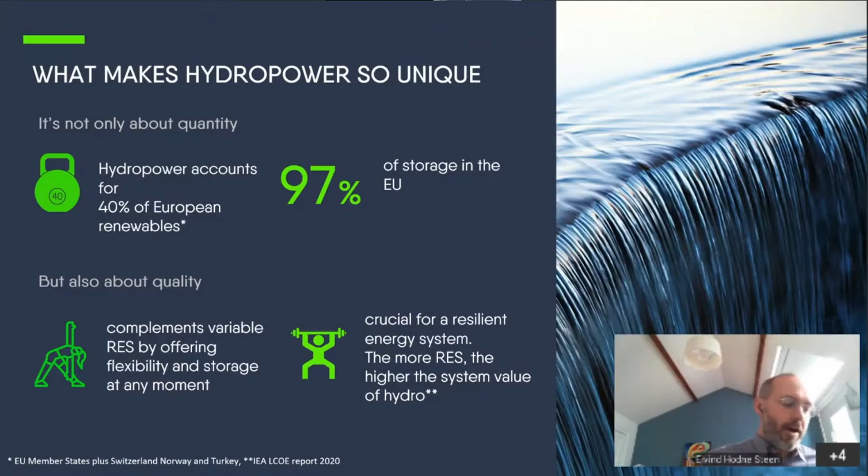And that is about the quantity, but then of course we know that the qualities of hydropower are important. It offers flexibility and storage at any moment. This will of course be brought up today in the session. But just one last point is that the more renewable energy we have, the higher the value of hydropower is in the system. So that's an important thing to bring to the table.

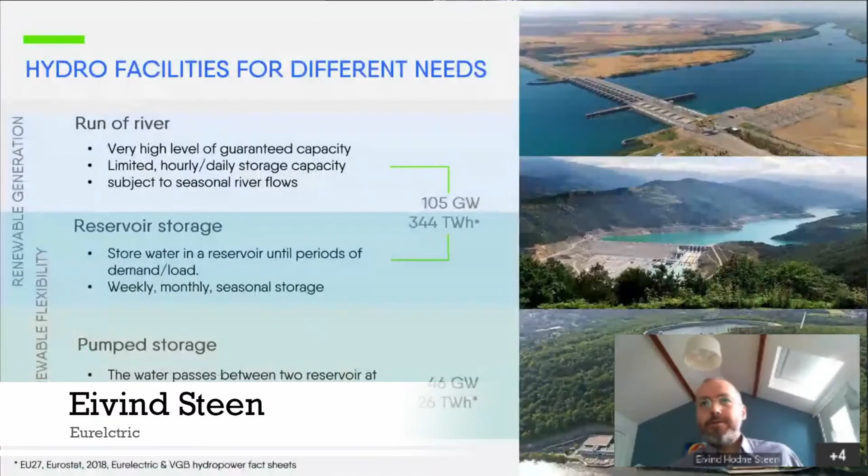So when we go into the numbers, we have, of course, hydropower facilities for different needs, and at least in our case in the Eurelectric world, we roughly divide it into two: renewable generation and renewable flexibility. And under there we have run-of-river, reservoir storage, and pump storage.

So if we look at the generation capacity of run-of-river and reservoir in Europe, you have 105 gigawatts. But if you bring in Norway, Iceland, Turkey, UK, and Switzerland, the numbers are obviously higher. We are about 180. And when we're looking at the generation of run-of-river and reservoir, we are at 344 in EU 27. But when we bring in these countries that I already mentioned, we are almost at 600 terawatt hours.

And then we look at pure pumped storage. We have a capacity of 46 gigawatts in EU 27. That goes up to 51 if we include these other countries. And the generation is at 26 terawatt hours, but with this larger scope with these other countries, you're at 31 terawatt hours. These numbers are 2018 numbers, so of course these are moving quickly. It's already 2.5 or 3 years.

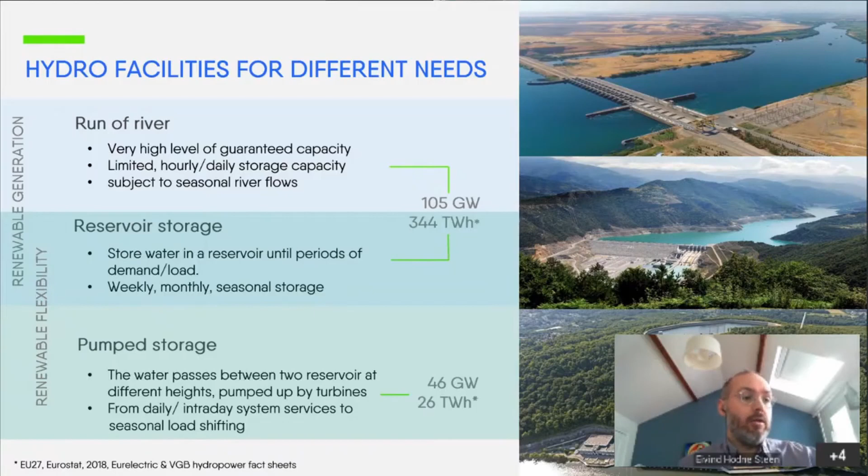In 2018 there were 1,005 terawatt hours of renewable electricity in total in the EU. I don't have a recent number there, but that is for sure a lot higher today. But to put this into context, we are in a situation where the EU has increased its climate target. That means that you need to have even more renewable power generation. So if the European Union is to reach their goal of 55%, you will need up to 67% of power generation to be covered by renewables. And wind will have to double, and solar would have to triple.

But what is interesting from the impact assessment from the European Commission is that they are also looking at an increase in hydropower generation of about 10%, and increased capacity of 40% for pumped hydro. So the Commission itself is looking at an increase of hydropower overall. So with that, I'm not going to go into more details. We're at the end, and I'm looking forward to hearing the other participants. Thank you very much.

Thank you, Eivind. Hydropower has a long history in Europe and is tightly connected with industrial development in many communities. One such place is Tyssedal in Norway. And I'm glad to give the word to Knut Markhus, Director of the Norwegian Museum of Hydropower. Thank you very much for the invitation.

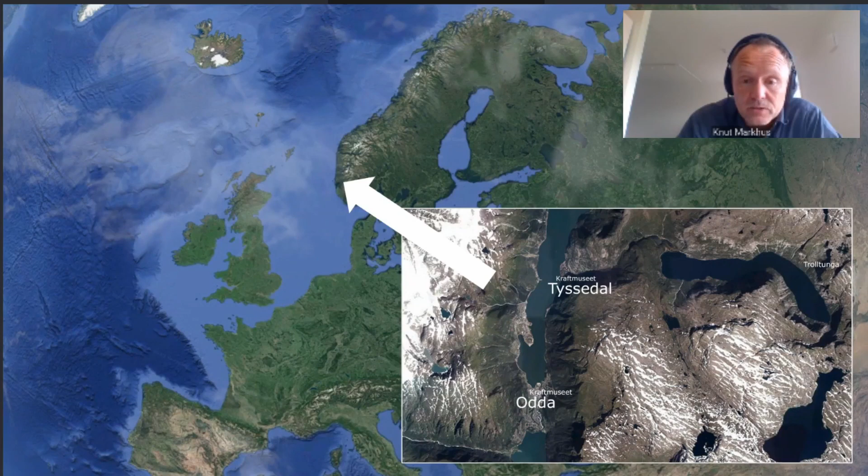The power plant is situated in Tyssedal, a small industrial village close to the small town Odda. This part of Norway is ideal for the use of hydropower, and Norway has taken advantage of that. There are many power plants in the west of Norway, where you have access to the sea, the connection to the rest of the world.

If we move back to the end of the 19th century, these were small farming villages. Odda had quite a lot of tourism, with many hotels rising, but no industry really. Tyssedal had only 2 farms with around 30 inhabitants, so it was a quiet place.

In the dramatic nature surrounding Odda and Tyssedal, the waterfalls and wild rivers were numerous, and the main attractions in the growing tourism. Some small mills used the running water, but the main use of the waterfalls, if you think business, was the magnetic power they had as tourist attractions.

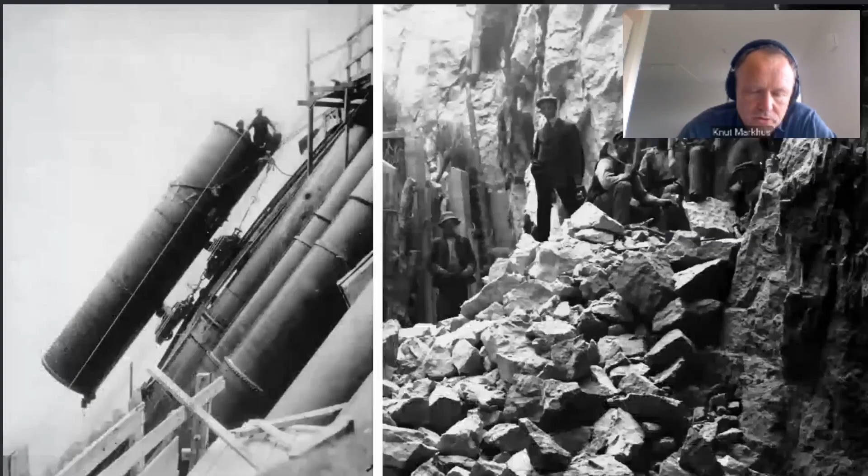And a great advantage is the fact that these places are located by the fjord with a sea route to the international markets. The group decide to go for this, and deals are made. And just a few months later, the construction work starts in Tyssedal and Odda. Sam Eyde is the general director for the hydropower company.

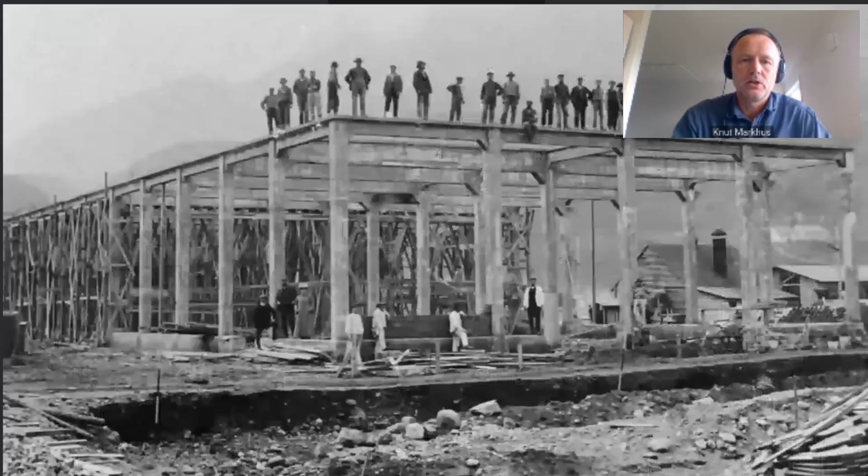Two big factories in Odda are planned and built by the Alby United Carbide factories and the Northwestern Cyanamide company. Alby to produce calcium carbide, and Northwestern to produce calcium cyanamide, and these two were linked together. Both of the companies had their headquarters in London, and this is an important thing. Many of the industrial establishments in Norway in this period have a foreign ownership, mainly Swedish, French and British.

And in less than 2 years, very quick, the hydropower plant was established, and the factories as well. And this was typical of the time, that factory and power station were built at the same time and close to each other, because the power was local. There was no system to transport it.

The completion of the construction in Odda and Tyssedal was quite impressive. The hydropower plant was the largest high-pressure power plant in Northern Europe, and the construction of the carbide and cyanamide plant was one of the largest undertakings of its kind in the world at the time.

Rapidly, Tyssedal and Odda developed from a farming district to modern industrial communities, complete with housing developments, schools and social services. In just a few years, the population in Tyssedal rose from 30 persons to more than 1,000.

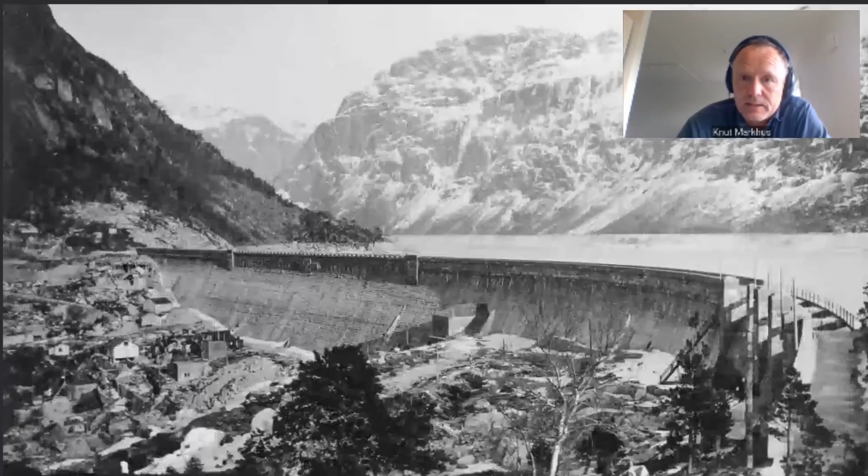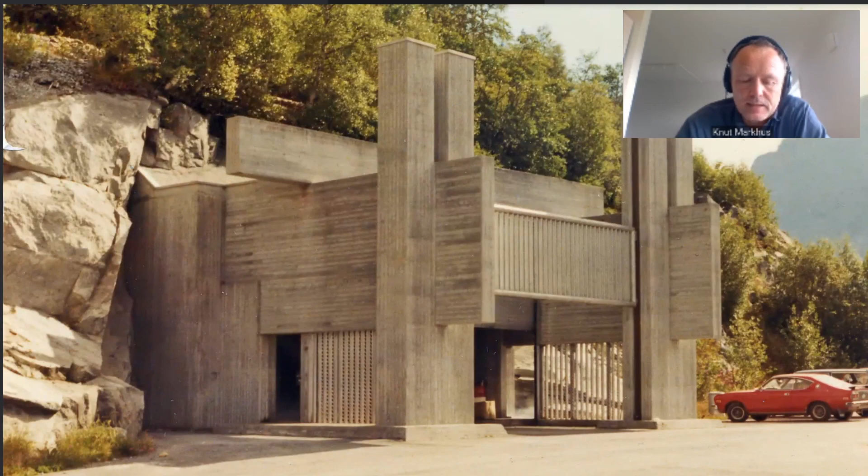The development of the hydropower plant and the industry continued the next years and the next decades. The huge Ringedal Dam was finished in 1918. A new power plant, Tyssedal 2, was finished in the same area in 1967, and now the power production in Tyssedal became a part of the national interconnection hydropower network.

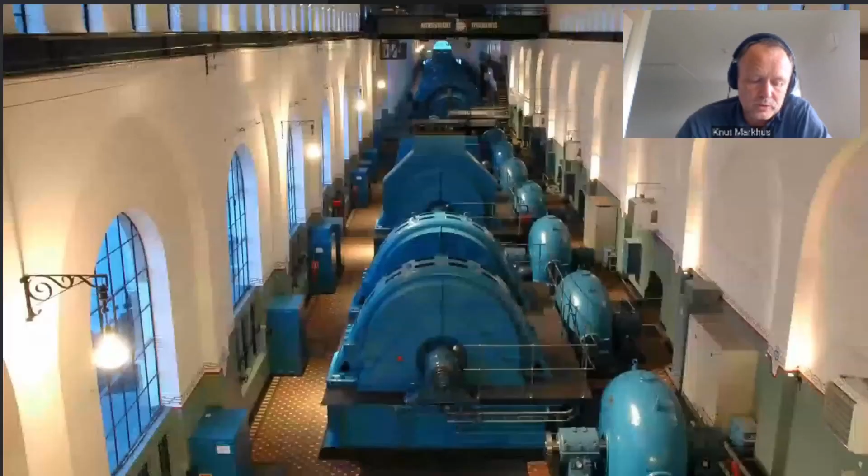When we come to 1980, the new power plant Oksla was placed inside the Tyssedal mountain. The old power plant that started its production in 1908 was then closed down in the late 1980s. In 2000, this was listed by the Directorate for Cultural Heritage and went through a comprehensive restoration project for 5-6 years, and now it's a part of our museum and telling this story.

We are still a hydropower municipality. Here you see the zinc factory on the picture in Odda, and Tyssedal behind. It's a heavy industry as the main business in this place. And Norway is a hydropower country. The Norwegian power system is largely based on hydropower. Around 95% of our electricity production comes from these resources.

This is also, next to oil and gas technology, one of the few areas where Norway is among the technological leaders in the world. And this is an important aspect with the hydropower development in Norway. From the start, around 1900 and the next decades, hydropower development built a knowledge and competence that became important in other areas as well. The expertise was transferable and useful when Norway started with oil extraction around 1970, and we can draw a line to the development of wind power today. The state-owned hydropower company Statkraft is a driving force in the wind power development.

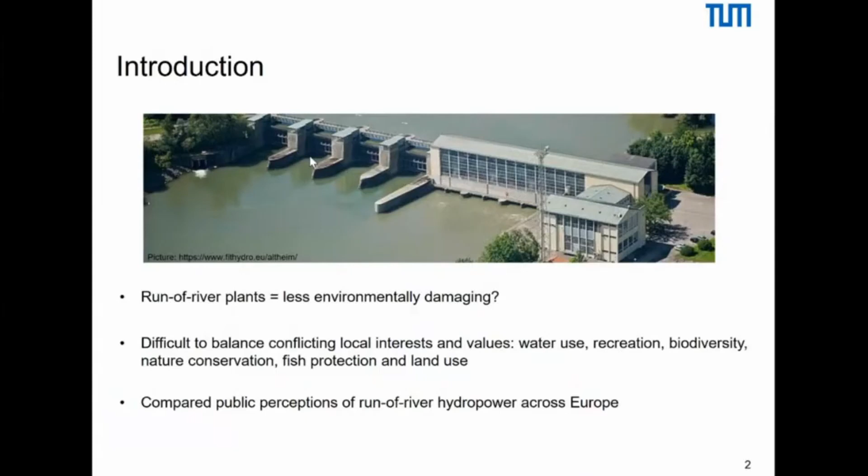All right, so today I'm speaking about challenges and perceptions of hydropower in the environment. And this is a study based on a public acceptance survey we conducted within the EU FIThydro project. A bit of background, as you heard, run-of-the-river plants have a significant generation and capacity across Europe, and they also have the perception that they are less environmentally damaging.

But at the same time, when there's many plants along the same river, it's difficult to balance conflicting local interests and values related to water use, recreation, biodiversity, nature conservation, fish protection, and land use. Thus, within our study, we compared public perceptions from local residents of run-of-the-river hydropower in their communities across Europe.

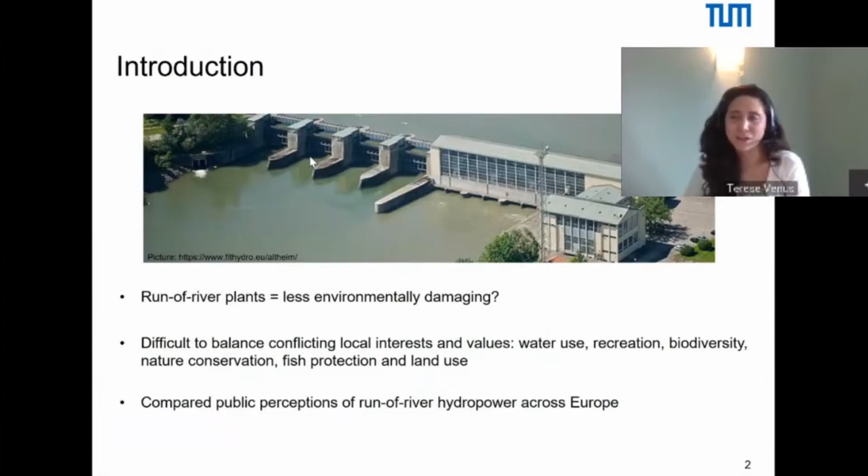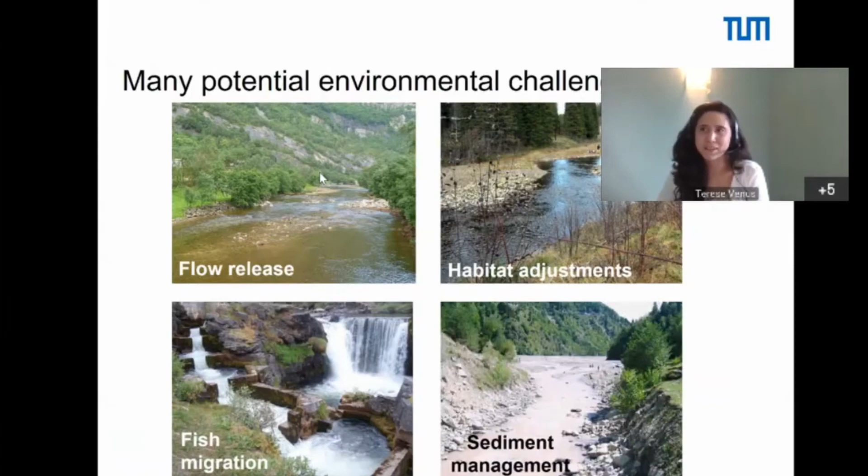So against this background, it's important to remember that there's many environmental challenges associated with hydropower, including flow release, habitat adjustments, fish migration, both upstream and downstream, and sediment management. But at the same time, there's many potential environmental mitigation strategies for all of these challenges. And so the goal of our study was to understand what perceptions are from locals of these hydropower, and also understand how to design better mitigation strategies to account for these beliefs.

So in our study, we focused on case studies across hydropower-rich regions in Europe, within the Alpine region in Germany, within Iberia and Portugal, in Sweden and Scandinavia, and France within the France-Belgium area. And in each of these case studies, we picked one main hydropower plant and an area city nearby where we conducted the surveys, and these were selected based on specific criteria.

So each of the case studies within the region needed to be in a hydropower-rich area, characterized particularly in the close vicinity by a number of run-of-the-river hydropower plants with smaller capacities. And they should also have an ecological measure in place. So we posed the question, what do locals think about hydropower in their region? And we structured public acceptance factors according to the following categories.

We thought about economic costs and benefits. This has to do with economic development, job creation, effects on other industries, tourism, fishing, as well as energy security. We also considered how hydropower may affect the quality of life in the area. How does it affect landscape aesthetics, health and safety issues, flood protection?

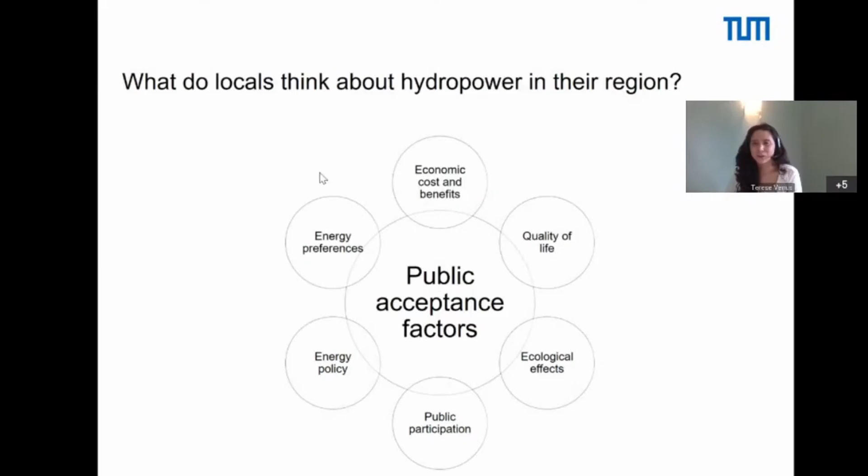And within the survey, we used a mixed method survey called the Q methodology, and we gathered statements related to these categories, and we asked locals, as shown here, to sort them into a grid based on how much they agree or disagree with the statement. And through this survey, we were able to identify major themes across the 4 regions and see where there was controversy and consensus and similar problems or good conditions across the 4 regions.

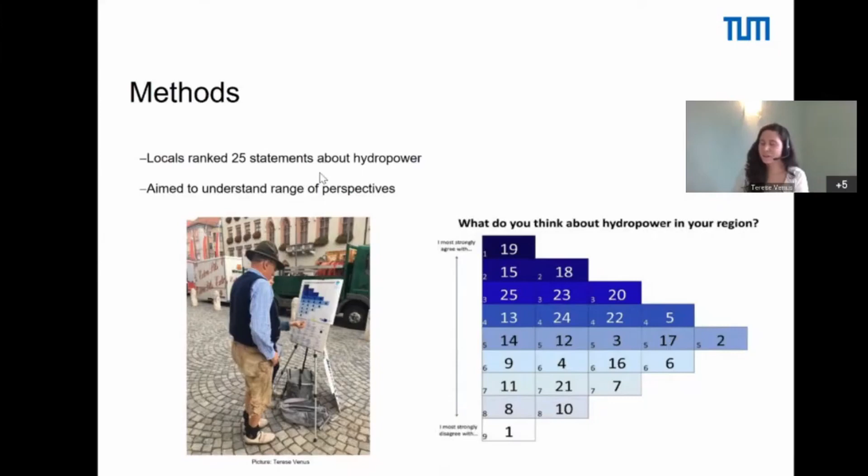In our analysis of around 250 participants, we identified 4 perspectives about run-of-the-river hydropower. Our first perspective represents maintaining regional control. As we heard, there's strong opinions about how people view ownership of hydropower and how it should be managed. So this factor was present in all of the 4 regions, and it was important to understand who owned and who had access to hydropower as a resource.

The second perspective was related to fighting climate change, and people that loaded significantly on this factor were concerned with hydropower's contribution to a renewable energy transition and any potential flexibility or energy storage it could provide.

Perspective 3 was focused on protecting natural ecosystems and supporting biodiversity and promoting fish protection and fish populations. And the fourth factor was focused on promoting citizen well-being, and this encompassed anything that could affect local citizens, including flood protection, but also recreational opportunities.

So across the 4 case study regions, the first 3 perspectives were present in all of them, but the fourth factor about promoting citizen well-being was unique to Portugal. And we think that's because in our case study regions, Portugal had experienced significant flooding in the past years, and it was thus a more salient point for locals there compared to the other countries of Germany, Sweden, and France. But what we see here is that what emerges as most important across these regions is both ownership and the protection of natural ecosystems and climate change.

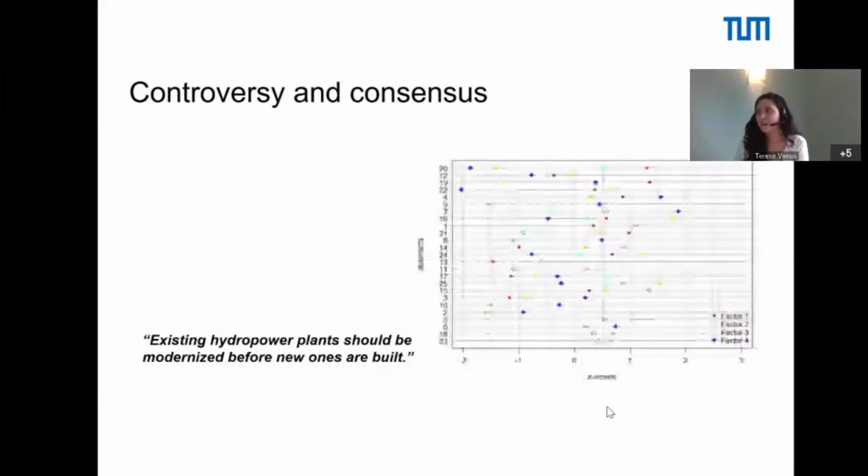On the other end of the spectrum, one of the most controversial statements was related to free-flowing rivers and the idea that rivers are meant to flow freely. So here we saw a strong disagreement, particularly between perspective 4 related to promoting citizen well-being, who disagree that rivers are meant to flow freely, and factor 3, which is focused on promoting natural ecosystems, that believes it's very important to promote the free flow of rivers, as much as possible.

And when we conducted the survey, we also asked the participants why they sorted them in this way. And one of the explanations related to free-flowing rivers is that hydropower should be limited as much as possible to particular river stretches or certain rivers to allow as many rivers as possible to freely flow. But of course, it's an interesting question to consider what is meant by free flowing and what is even the natural flow of a river after such a long history of hydropower development.

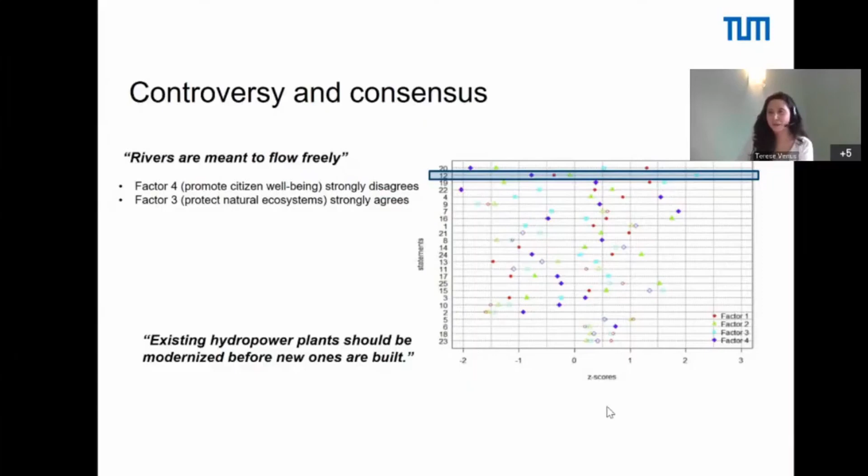So the key takeaways from our surveys across these 4 regions was that a major theme of controversy was plant ownership. It was unclear whether it should be state-owned or privately owned, and there were certainly strong opinions about whether foreign companies should be allowed to own hydropower in each of these countries. But there was significant consensus across the regions about the importance of supporting modernization of hydropower, as well as supporting ecological measures, both in the form of fish protection and flow measures.

So one of the main recommendations from our research is that monitoring is extremely important, and communication. And we came to this conclusion because one of the main issues with ecological measures in these specific case studies was that there was quite a lot of confusion about how the measures worked and whether they were working at all. So if they are working and there's monitoring being conducted, it's important to communicate those results to the public and explain.

If you're interested in more about this research, I refer you to our publication in Energy Policy. And finally, this is again research conducted within the FIThydro EU project. Thank you. Thank you, Terese.

The title for today's event is European Hydropower is important for the Green Deal. Why do we make this claim? To help clarify this, I'm happy to welcome Fredrik Engström from Vattenfall, Sweden. Yes, hello everybody. Fredrik, can you explain a bit which role hydropower has today in the Swedish power system and how it interacts with other renewable energy sources?

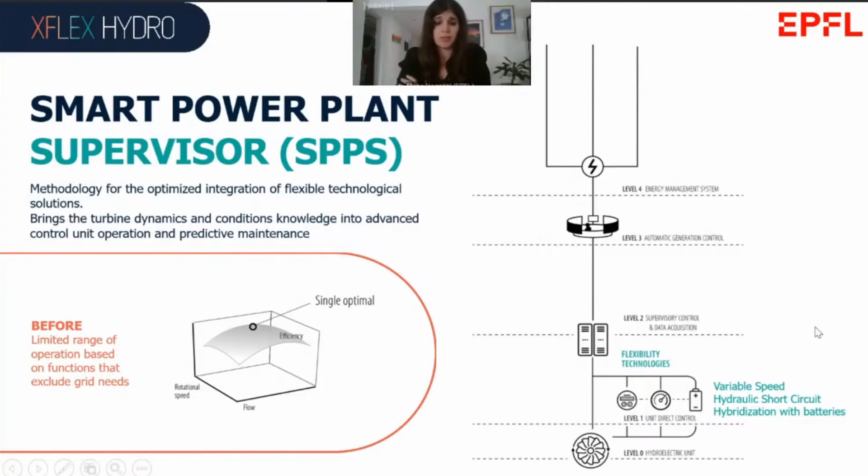Typically before our project, at least up to now, except for a few exceptions, hydropower plants normally work around one single optimal point. What we are doing with our project is, first of all, to implement and optimize the new flexibility technologies that are already available on the market, namely variable speed, hydraulic short circuit, and hybridization with batteries, depending on the characteristics of the power plants. And we are adding a digital tool, the Smart Power Plant Supervisor, that leverages all the information and knowledge that we can have from the operation of the power plant and optimizes the use of those technologies.

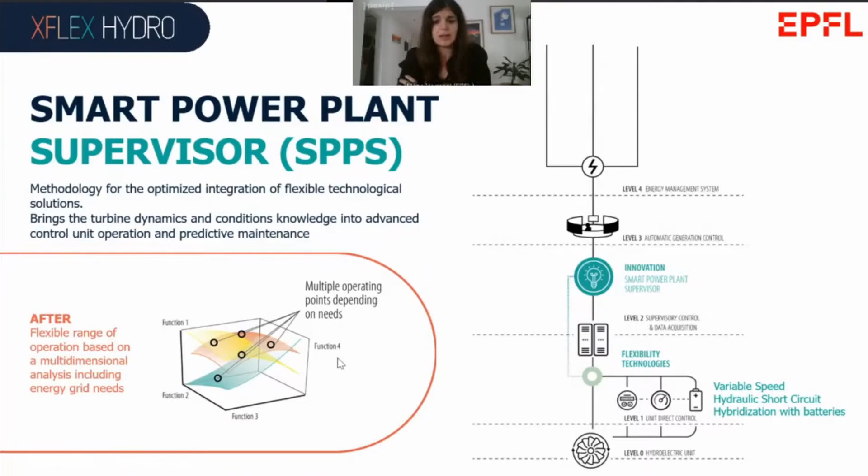What we want to achieve, instead of having one single optimal point of operation around which the operator can play, is multiple points that take into account several dynamics and not only, for instance, the best efficiency point of the power plants. So that was really an overview of our project.

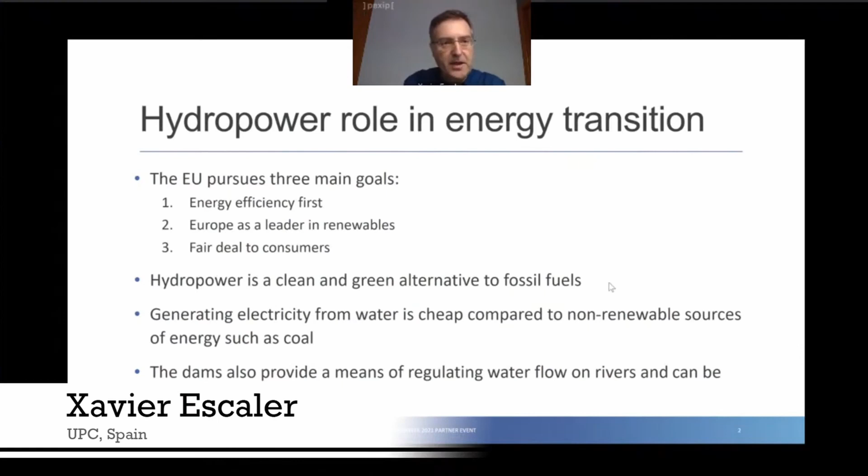Okay, so thanks again, and I am very pleased to present the active flow control system for improving hydraulic turbine performance at off-design operation. It has already been clearly described in the previous presentations that hydropower has a very important role in the energy transition, and in particular, the European Union is looking for three main goals. We want to put energy efficiency first. We want to make Europe a leader in renewables, and we have to achieve a fair deal for consumers.

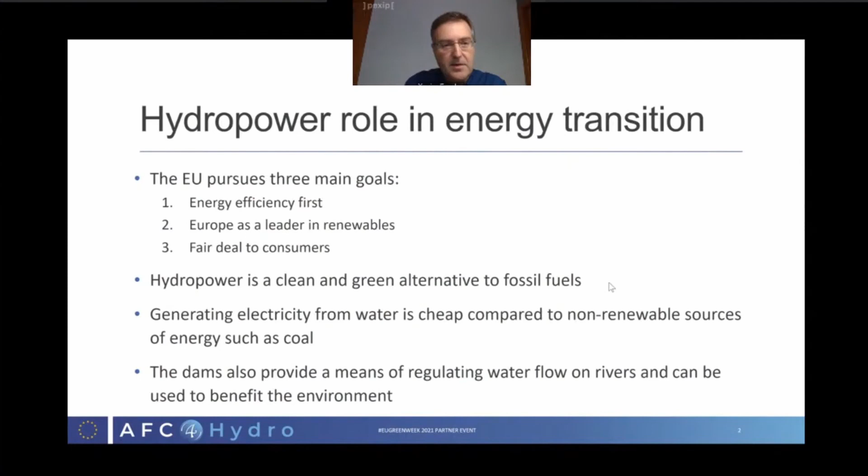So based on these objectives, it is very clear that hydropower is a very clean and green alternative to fossil fuels, and it permits generating electricity in a cheap way compared to other non-renewable sources of energy, such as coal. Moreover, the dams where we have installed the turbines can also provide a means of regulating water flow on the rivers and can be used to benefit the environment.

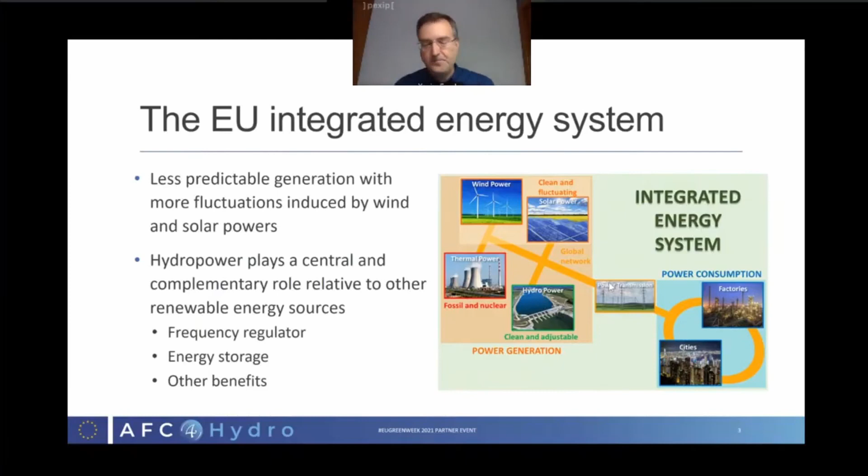Anyway, we have to take into account that the change of climate conditions is going to affect hydropower negatively. It is clear that we will have to face alterations of the natural waters. For instance, extreme weather events will alter the river runoff due to the change of precipitation and temperatures, which will pose significant problems for hydroelectricity generation.

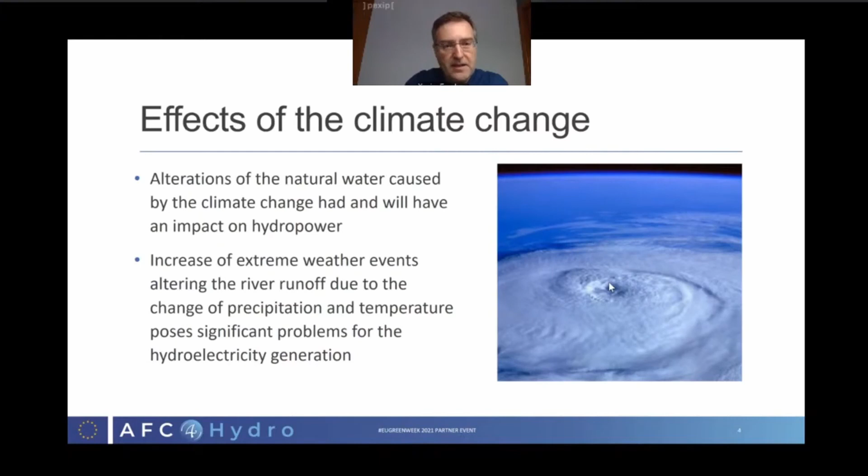Therefore, the conclusion is clear. We need to improve hydropower technology, and this is the main objective of the AFC4Hydro project. In particular, this project is focused on the improvement of existing hydraulic turbines of any size and capacity, and the idea is to try to improve their efficiency, to enlarge their operation range, and to ameliorate the performance.

But the difficulty of trying to achieve this enlarged operating range is that at these conditions we sometimes have unstable pressure pulsations and also, for example, unacceptable cavitation levels that need to be reduced if we want to reach our objective. So that's the idea behind our project.

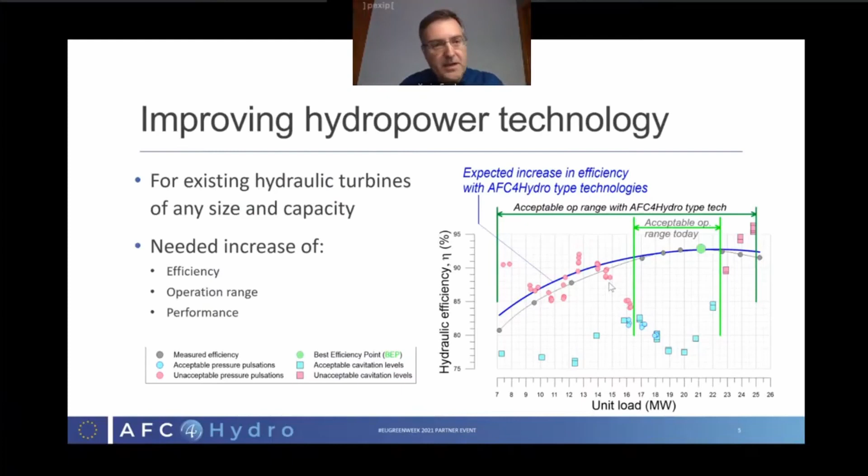So the conclusion also, if we achieve the expected objectives, is that the impact will be very good for hydropower. With this new technology, this new system, we tend to increase generation flexibility. This will allow a better integration of hydropower in the energy system. If the hydropower performance is increased, we will also make generation costs very low compared to other non-renewable sources.

Moreover, we will also be able to reduce the cost of existing units, which will favor the circular economy. And nonetheless, we will be able to reduce the environmental impact by improving the utilization of water through the hydraulic turbines. In summary, the achievement of the objective will increase hydropower competitiveness.

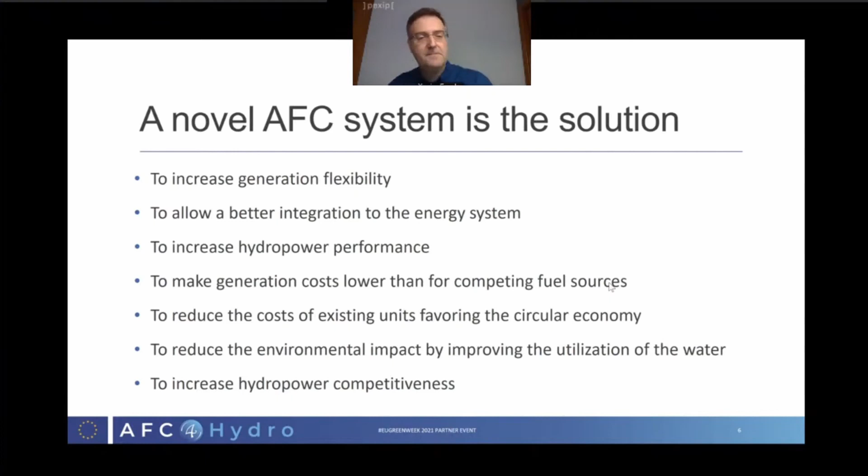So our proposal is to develop what we call injection systems, which should be controlled and optimized methods to add energy in the draft tube during operation in order to reduce these negative effects out of design operation. In order to verify that our injection systems, which are called IPM and ICM, corresponding to injection of pulsating momentum and injection of continuous momentum, work well, we will continuously monitor the condition of the machine

by means of a structural health monitoring system that will fit a mathematical algorithm inside the controller, and that will decide the best injection operating conditions to be introduced in the machine in order to achieve optimal hydraulic turbine operation, efficiency, and dynamic behavior. One of the restrictions of this system is that at the end, this concept should be affordable and suitable to be fitted in already existing hydropower turbines of any size and design.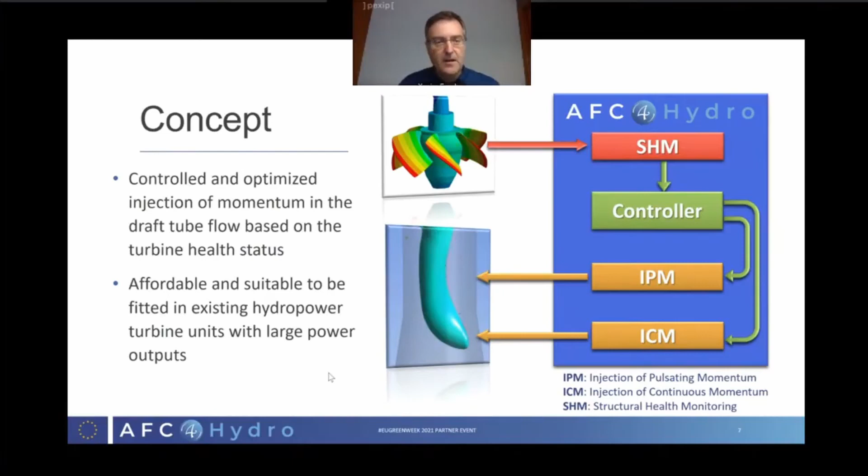For that, we have already started to prepare a series of tests that will evolve from laboratory experiments in more scientific conditions to more real industrial environments in the case of full-scale prototypes, as we see here in this slide. We will start with laboratory tests at the turbine model test stand located in the Älvkarleby laboratory that belongs to the Vattenfall Research and Development Center located in Sweden.

Then after these first laboratory experiments, where more scientific objectives are intended to be achieved, we will move to more real applications, as I said, like a 10 megawatt power plant with a Kaplan runner that is located in Porjus and belongs to the Porjus Foundation, also in Sweden. And finally, the last test at the end of the project will be carried out in a very large Francis turbine power plant located in Oksla with 210 megawatts, which is owned by Statkraft.

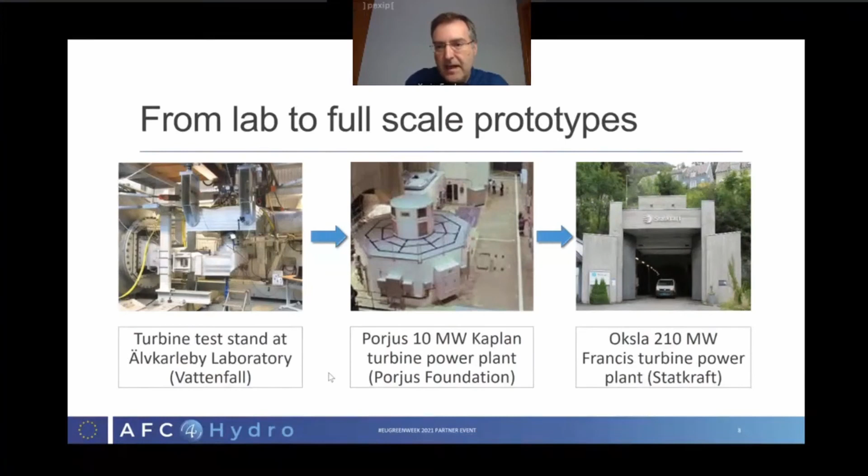In order to do this work, we have built a consortium that is formed by two universities, Universitat Politècnica de Catalunya and Luleå University of Technology, a small and medium-sized company, Flow Design Bureau, from Norway, the Porjus Foundation, which will provide access to the Porjus power plant, and then finally, two of the largest European renewable energy producers, which are Vattenfall from Sweden and Statkraft from Norway.

And just to conclude, I acknowledge the European Union's Horizon 2020 Research and Innovation Program, which is funding this project.

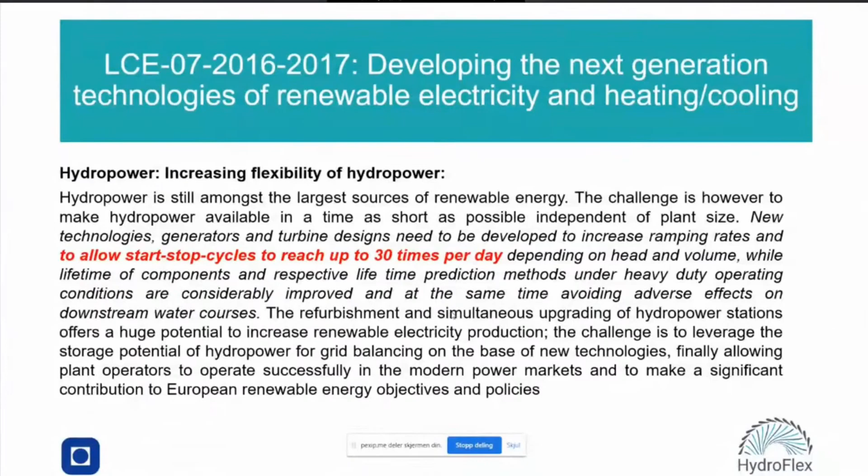And when we run simulations with different scenarios, even the most optimistic scenario will not reach up to 30 start-stops per day. But the whole point of the project is to evaluate or to develop a technology that can handle high flexibility for the European energy system and market in the future. The green hydro scenario gave up to 10 start-stops per day, but that was in extreme situations.

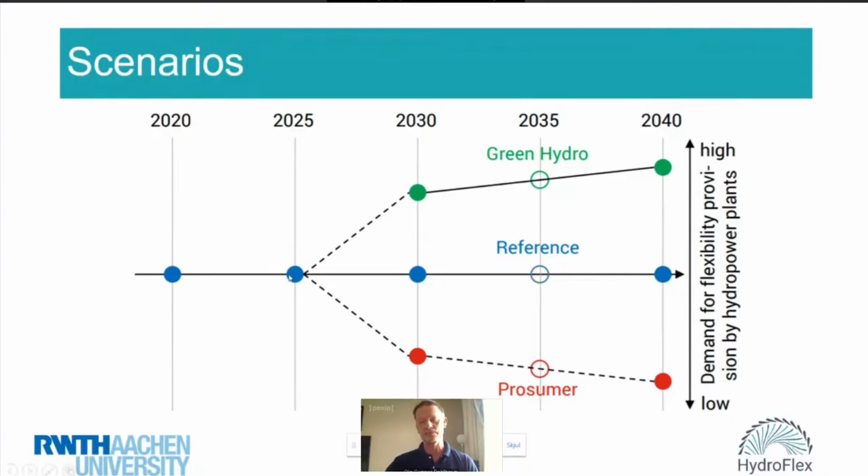What are we doing? First of all, it's meant to look into different technologies, and we are looking into turbines, generators and transformers. And first of all, on the turbine side, when you're increasing the flexibility and the number of start-stops of the turbine, you question the turbine lifetime. So you need to look into models of turbine lifetime.

I think the most common question people come to me with when we talk about the new flexibility market is the remaining lifetime, or what does it actually cost to operate flexibly? What does it cost to the turbine? What kind of maintenance cost or reduced lifetime are we having? Those are the things we are looking into.

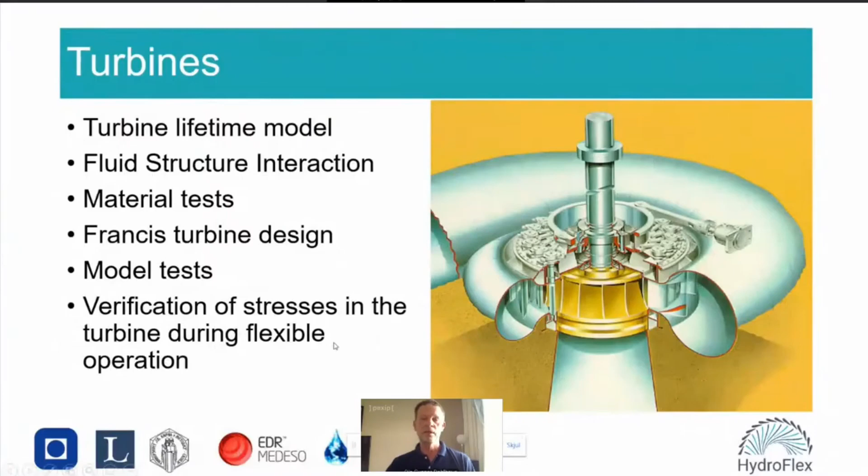So we are addressing lifetime reduction by looking at the stresses in the turbine, and by doing model tests where we are measuring the stresses in the blades, we can calculate a reduced lifetime based on start-stops, high rampings, and these things. And the generator and the converter is also needed. We are utilizing variable speed operation in order to have less fatigue loads on the turbines.

So what are the questions there? First of all, we need high power frequency converters, more than 100 megawatts, and of course, we need to have joint control of converter and rotor magnetization. These are tested in the Swedish center Porjus, which was shown earlier by Xavier and from the AFC4Hydro project. So Vattenfall is also part of this project.

And we need to mitigate the effect from high power electric converters, fast voltage switching. So these are the things we are developing, and new patents have already emerged, especially for the rotor magnetization project.

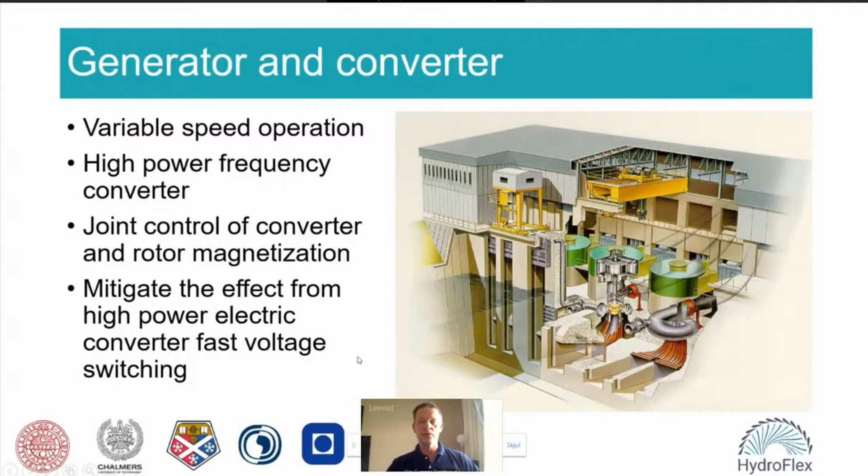We have to look at the environmental impact and its mitigations from this operation. Imagine having 30 start-stops where the water goes into a river downstream the power plant. Of course, that will have an impact. The question is how and why. So we are questioning those things in a downstream power plant in Sweden, in Umeå. And we are working on the social acceptance questions right now.

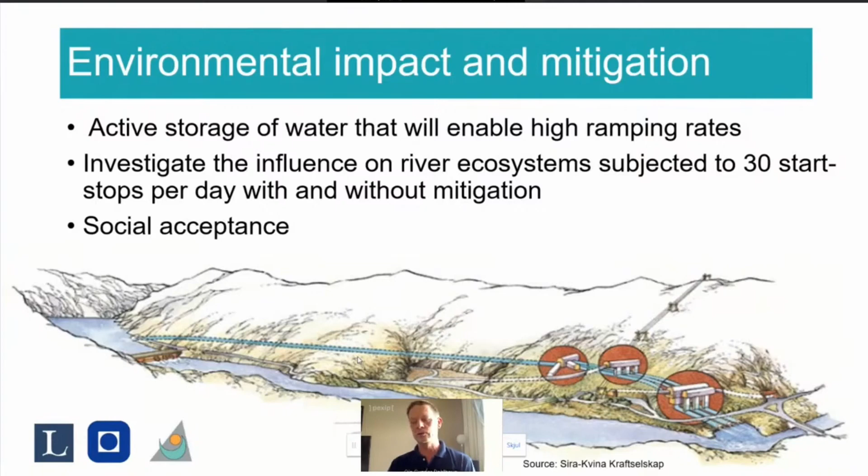The mitigation, though, is to try to dampen the large fluctuations of flow. So in the project, we have developed an air cushion underground reservoir system, kind of like a reservoir downstream that can dampen the fast fluctuation in the river downstream the power plant. So there's an illustration of a reservoir downstream the turbine, which handles the fluctuations. The question here is how to operate it in order to dampen the waves or large variations in the river downstream the power plant.

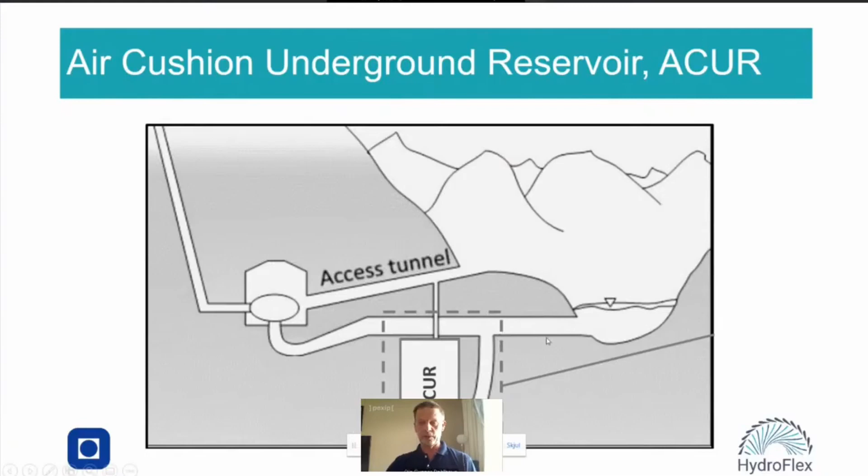So what kind of impact do we have from this? First of all, all of us are talking about the hydropower system as an enabler of more renewables in the system. I think that's the mantra these days when it comes to hydropower. We can reduce the maintenance cost and extend the lifetime of the existing components and also new components. And then we are looking at increased turbine and generator performance.

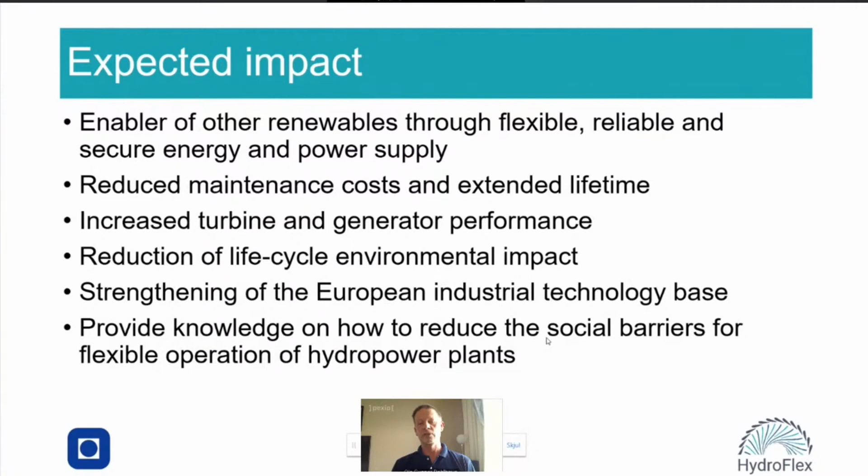Lifetime, environmental impact, and also to strengthen the industrial technology base. And in the end, we will provide the knowledge on how to reduce the social barriers for flexible operation of hydropower plants. That's what Hydroflex is about.